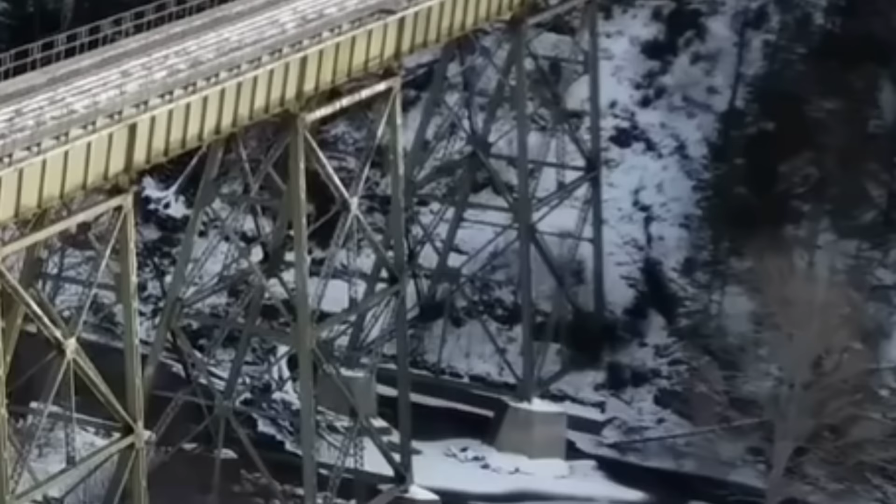A fully loaded freight train, thousands of tons, reaches a century-old bridge at full line speed. The driver doesn't brake. He's not supposed to. His rulebook, written by the engineers who assessed that structure, says maintain speed. Your instinct says that's reckless. Slower is safer. Less weight per second, less stress, less risk.

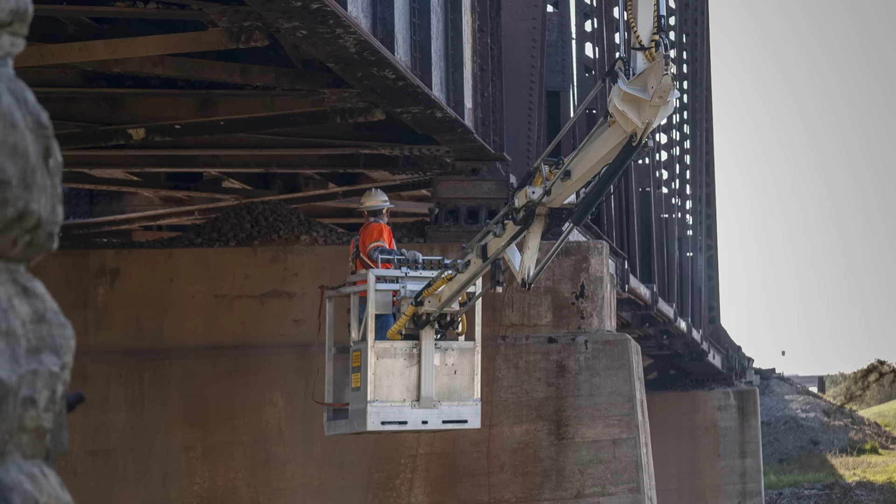But railway bridges weren't designed for caution. They were designed for a specific moving load at a specific speed. And here's what no one expects. Under certain conditions, slowing down on the span doesn't reduce the danger. It introduces forces the bridge was never built to handle.

A freight train carrying 10,000 tons of cargo approaches a steel truss bridge built in 1920. The operator does not ease off the throttle. There are no yellow warning signals, no automated brake triggers at the approach, and no sudden commands from dispatch.

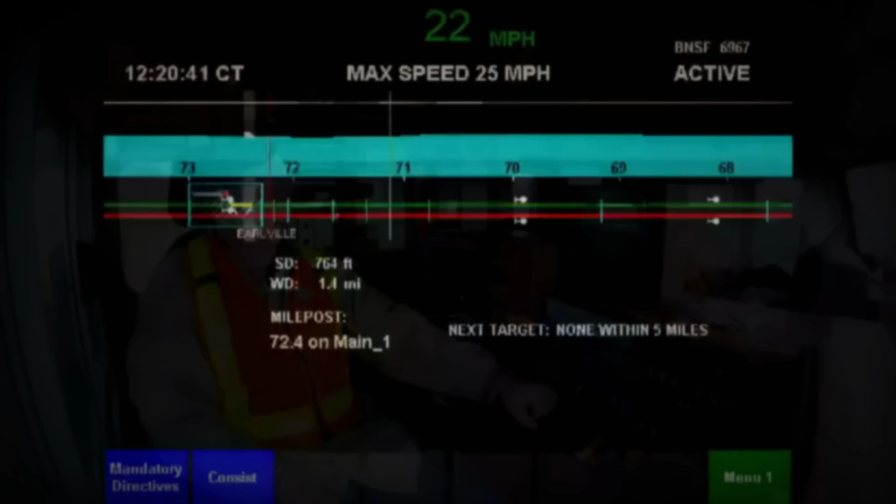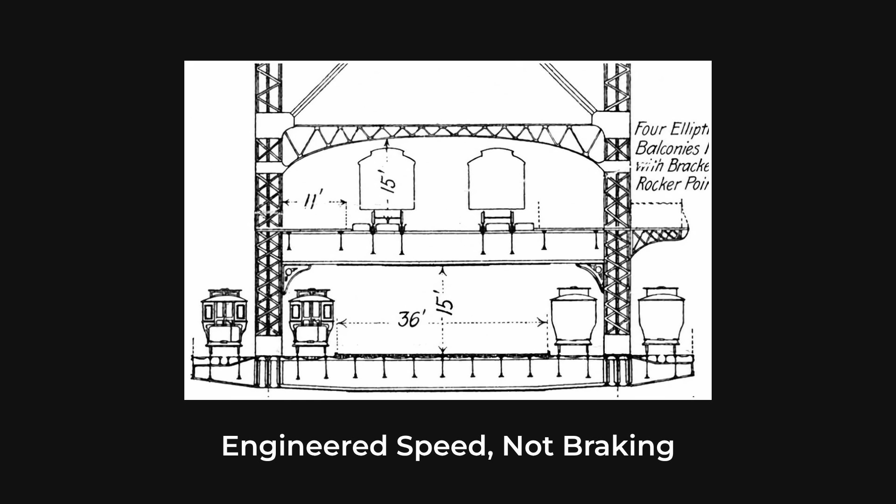Instead, the train enters the first span at 60 miles per hour, the exact line speed authorized for this segment of the corridor. This number is not a casual choice or a limit of the locomotive's engines. It is a strictly controlled operating value, calculated and approved by structural engineers long before this specific trip began.

To the driver, the century-old bridge is not a hazard requiring caution. It is simply another pre-approved section of the track. Yet, to anyone watching from below, this lack of braking feels incredibly wrong. Everyday experience on roads tells us that heavy loads must slow down for structures. But on the rails, the driver keeps moving forward at speed.

This apparent inaction exposes a fundamental rule of railway physics. Traveling over a bridge at a steady pace is highly predictable, whereas changing that motion might be the very thing that threatens the structure. Initiating deceleration while traversing a bridge can be more structurally demanding than continuing at a constant, authorized speed.

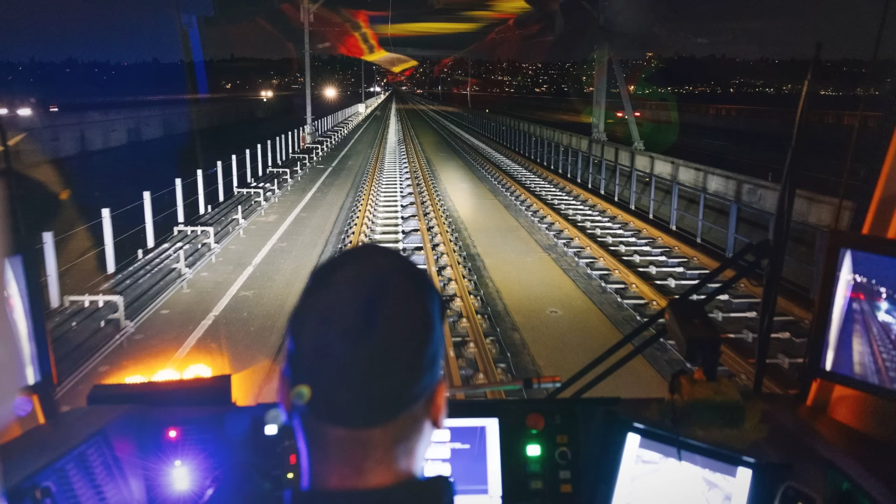This is not a claim that high velocity is inherently safe, nor is the practice of maintaining speed a universal rule. If a signal changes, an obstacle appears, or immediate danger threatens the track, emergency braking remains essential and non-negotiable. However, for a train already operating safely within its approved limits, a sudden change in speed alters how the structure performs. Slowing down does not automatically increase safety.

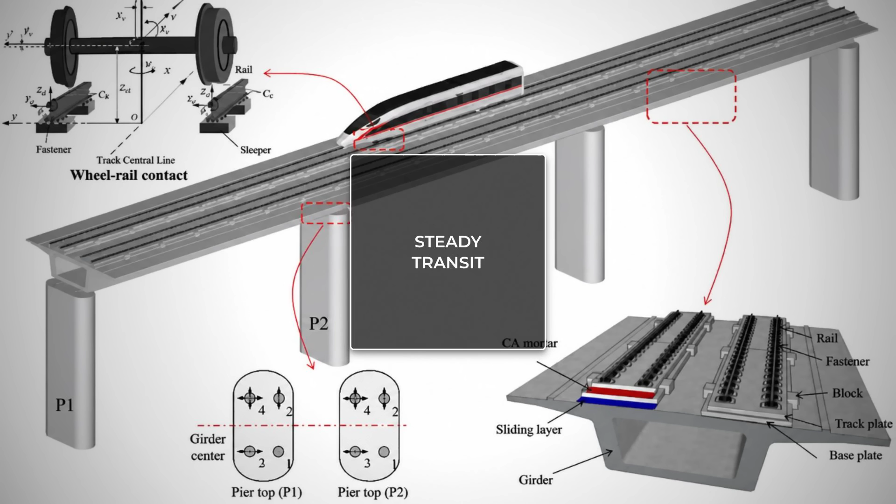Instead, the transition from one speed to another alters the physical state of the system, introducing forces that do not exist during steady-state transit. While a constant speed represents a balanced equation, changing that velocity changes everything. This raises a fundamental structural question. What happens to a bridge when a multi-thousand-ton vehicle changes its speed mid-span? And why does a steady, rapid crossing keep those hidden forces at bay?

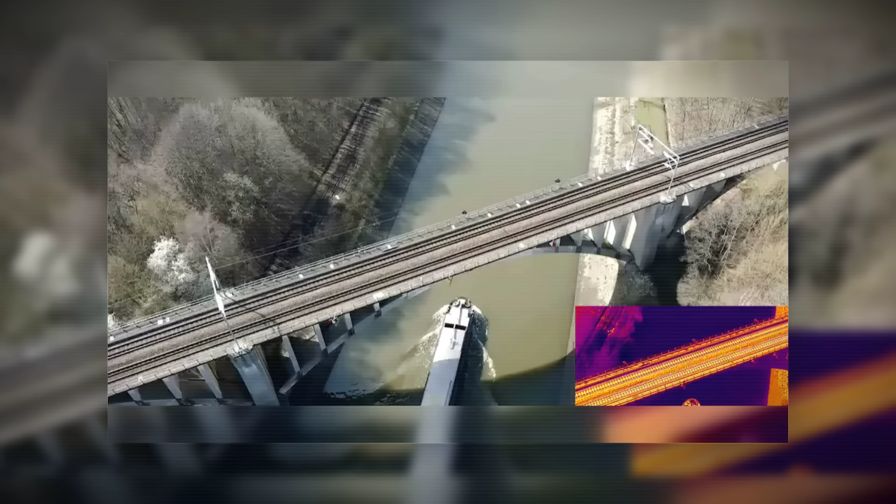Bridges are among the most heavily monitored assets on any rail network. Their structural integrity is constantly tracked through physical inspections, maintenance records, and strict operational controls. While early historical records sometimes associate these structures with catastrophic failure, actual accident databases show that collapses are rarely simple events. When metallic spans do fail, the causes are almost always foundation scour, material fatigue, or design limits, not speed.

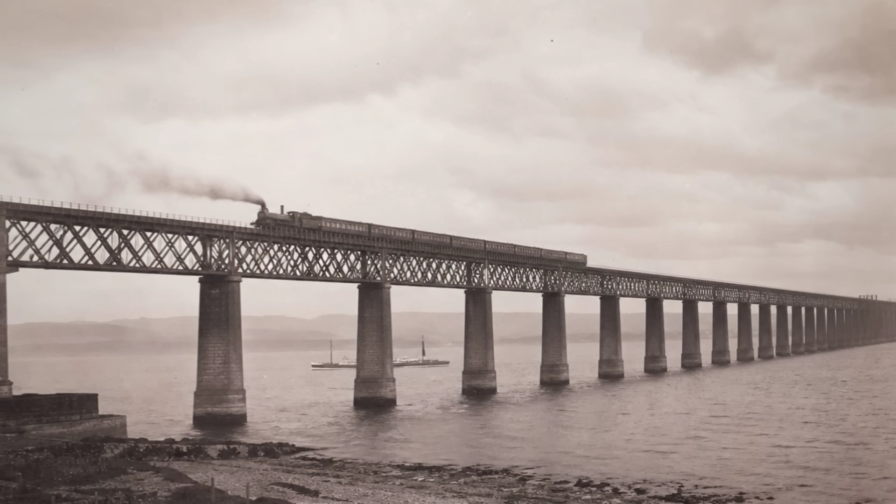Even the 1879 collapse of the Tay Bridge was not caused by a train traveling too fast. The official inquiry blamed weak wind bracing, defective cast iron lugs, and poor inspection standards during an extreme storm. The disaster served as a warning about structural assumptions under lateral wind loads, not velocity. Modern railway management relies on this distinction, shifting the focus to how an agency calculates exactly what a span can carry.

Our instinctive relationship with speed is forged almost entirely on the highway. If you are driving a car or a heavy truck toward a narrow or aging bridge, your natural reaction is to lift your foot off the accelerator and press the brake. This response is entirely rational. In road transport, lower speeds directly translate to safety.

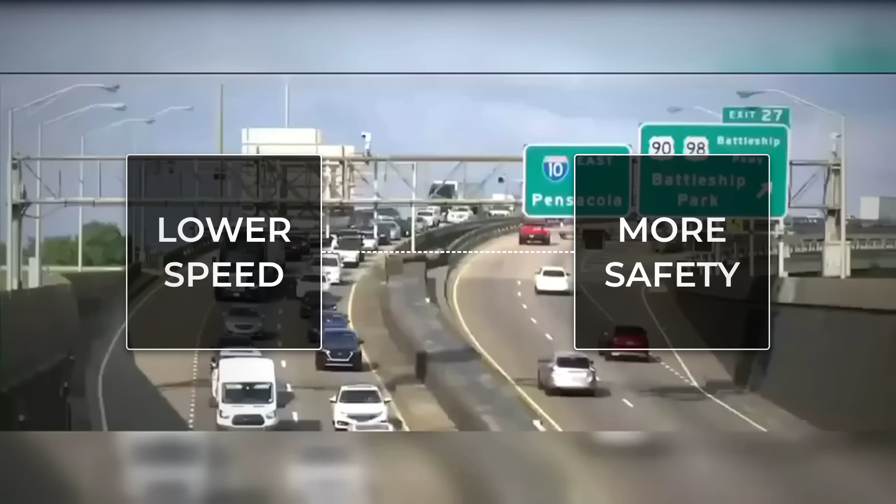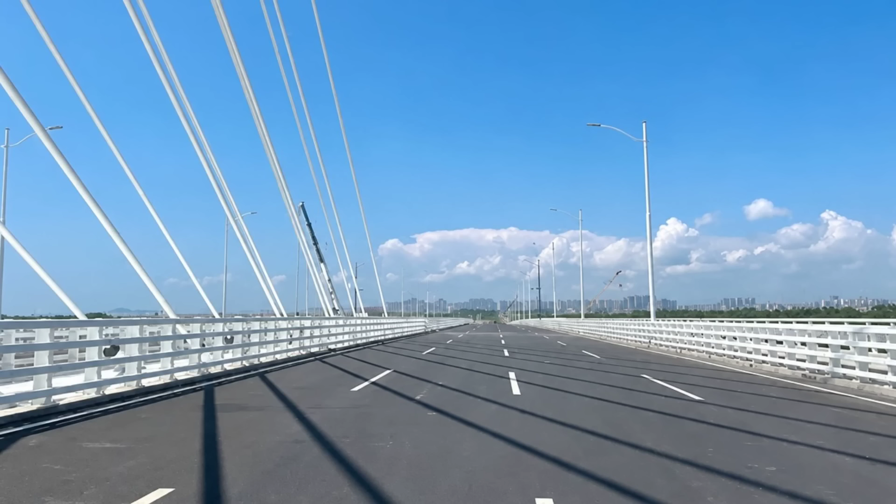By slowing down, you dramatically reduce the kinetic energy of your vehicle, which decreases exponentially with every mile per hour you shed. If a hazard appears on the span, a slower vehicle gives its driver more time to perceive the danger, steer away, or bring the vehicle to a controlled stop. Even if a collision is unavoidable, the force of the impact is vastly diminished, saving lives and protecting the bridge's guardrails and supports from catastrophic damage.

On the road, going slower is an uncomplicated way to reduce physical stress and lower the stakes of any unexpected event. However, applying this highway mindset to a multi-thousand-ton train reveals a major disconnect between road traffic and railway physics. A road vehicle is a self-contained, highly localized mass that relies on steering and rapid friction changes to navigate.

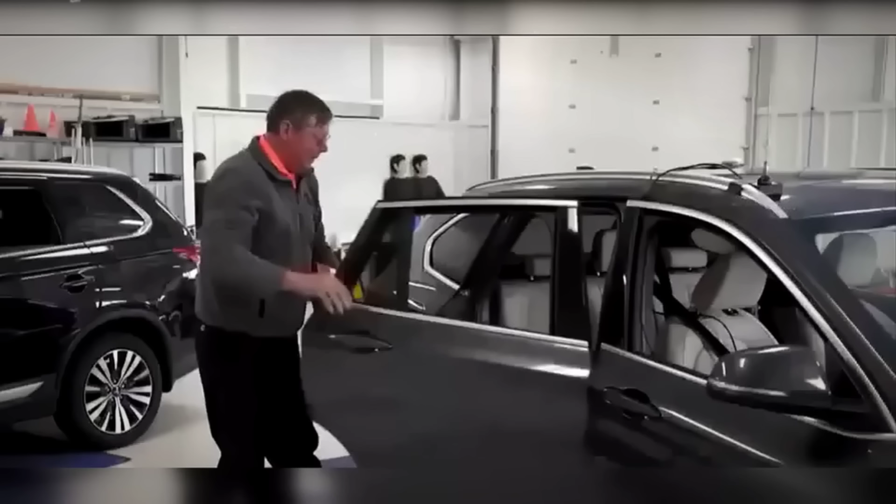When a driver slams on the brakes, the car undergoes a sudden shift in balance, transferring its weight forward onto the front tires over a tiny patch of pavement. A train, by contrast, is a vastly different physical entity. It is an incredibly long, continuous chain of heavy segments, with its immense weight distributed across dozens or hundreds of individual axles. Because of this distribution, a railway bridge does not experience a train as a single, massive blow.

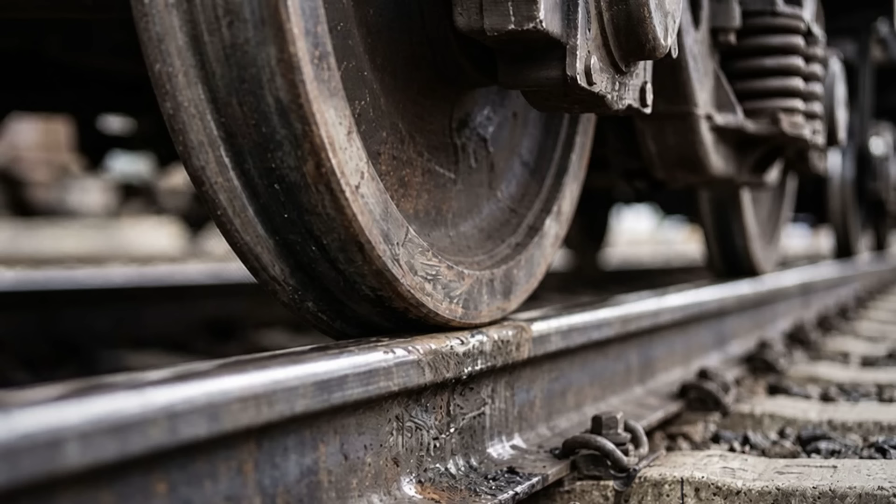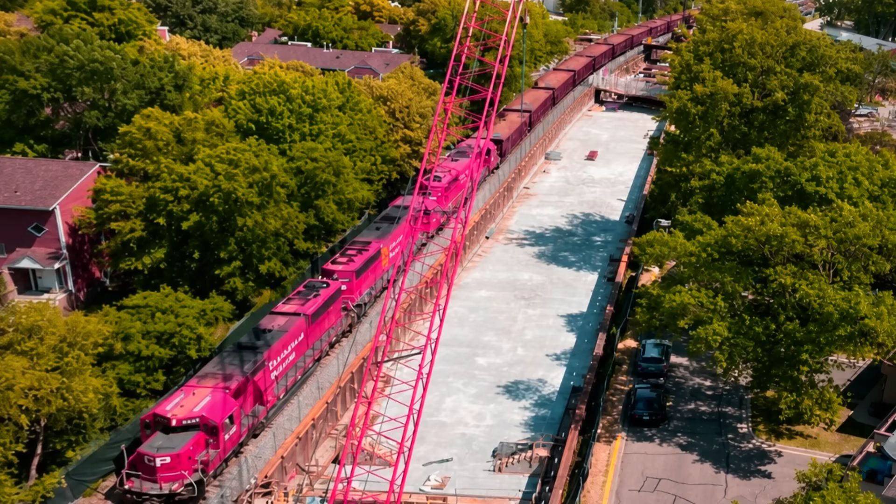Instead, the structure registers the train as a highly organized, rhythmic sequence of individual axle loads, arriving one after another. The bridge deck, the underlying steel girders, and the supporting concrete piers respond to this sequence in real time. The bridge's response is governed by both the total mass of the train and the precise spacing of those individual wheel loads. This means that speed changes both the size and the precise timing of the forces acting on the bridge. As each axle rolls onto the span, it sends a wave of energy through the structure.

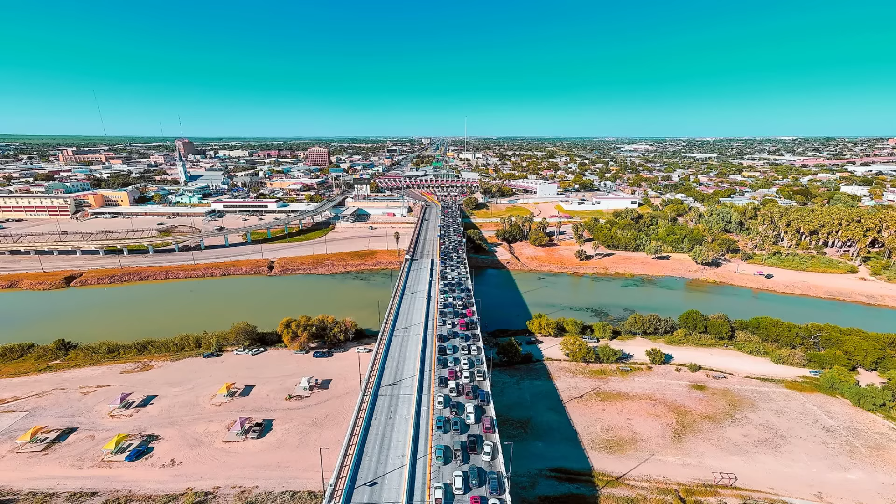If the train is moving at a constant, predictable rate, these pulses of energy flow through the bridge in a highly patterned way. At this level of scale, the train and the bridge behave as a single unit. They function together as a connected mechanical system, where the movement of the train and the elastic flexing of the steel and concrete are bound in a continuous physical dialogue. The common assumption that slowing down is always safer ignores how this coupled system operates. To see why a fast, steady crossing is often the gentlest path across a span, we must examine what happens when this carefully balanced mechanical relationship is suddenly disrupted.

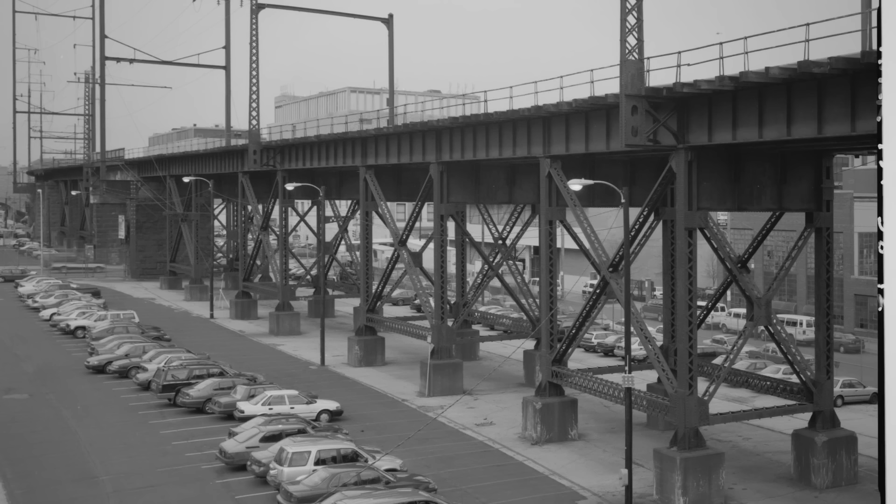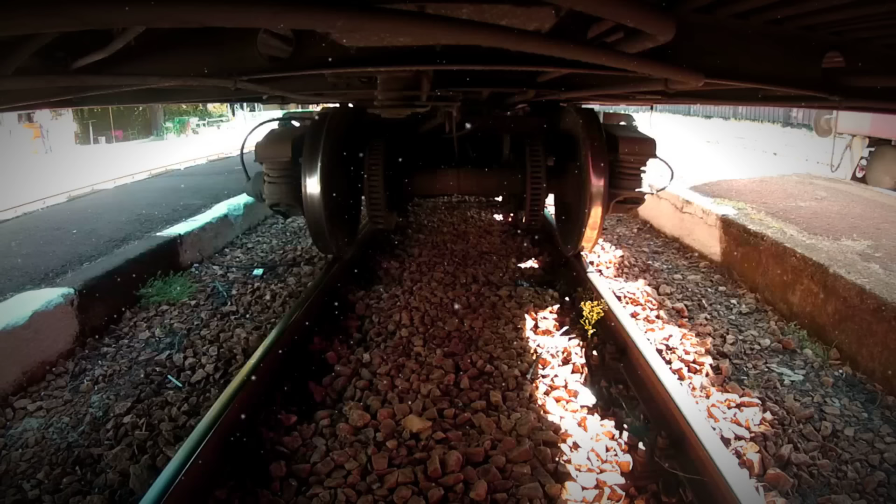A train parked on a bridge represents a straightforward structural problem. It is a dead weight, a static load that exerts a constant, unchanging downward force on the steel and concrete below. But the moment those wheels begin to turn, the physics of the bridge shift entirely. A train crossing a span at 60 miles per hour acts as a rapid series of physical impacts, a moving sequence of axles that creates an entirely different structural case. As each set of wheels rolls onto the span, travels across, and departs, it introduces forces that fluctuate in real time. The bridge deflects downward, springs back upward, and vibrates.

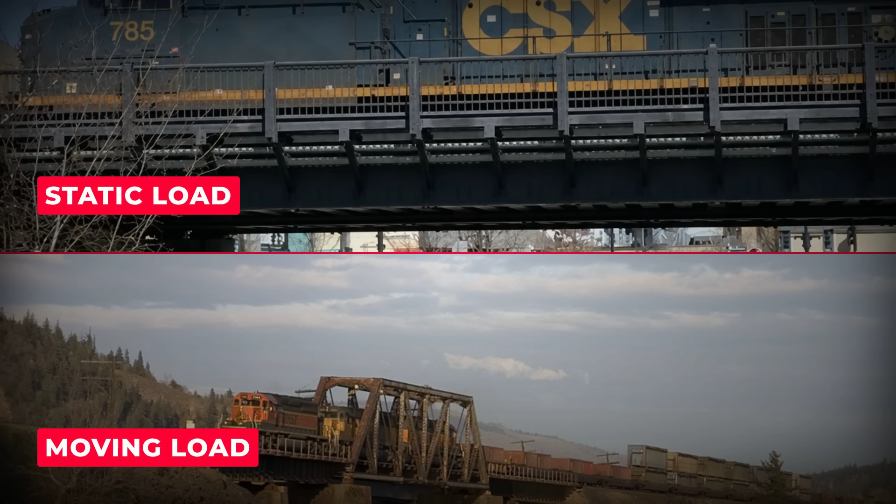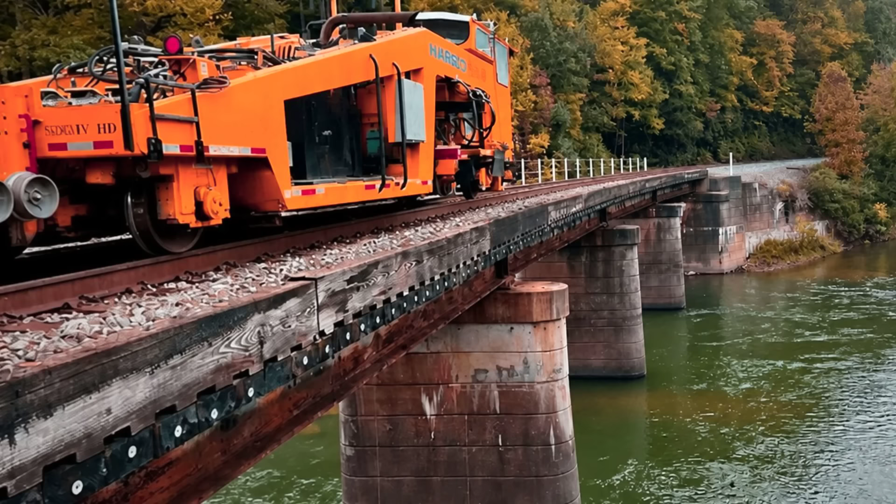This motion-related increase in structural stress is known as dynamic load amplification. It represents the divergence between a load placed gently upon a structure and that same load rolling across it at speed. This amplification is not a simple, fixed number. It is a complex, fluctuating value shaped by the physical relationship between the vehicle and the structure. Several factors dictate this behavior: the length of the span, the speed of the transit, the precise spacing of the axles, the overall mass of the train, the behavior of the locomotive suspension, the damping characteristics of the bridge, and even tiny irregularities in the track itself.

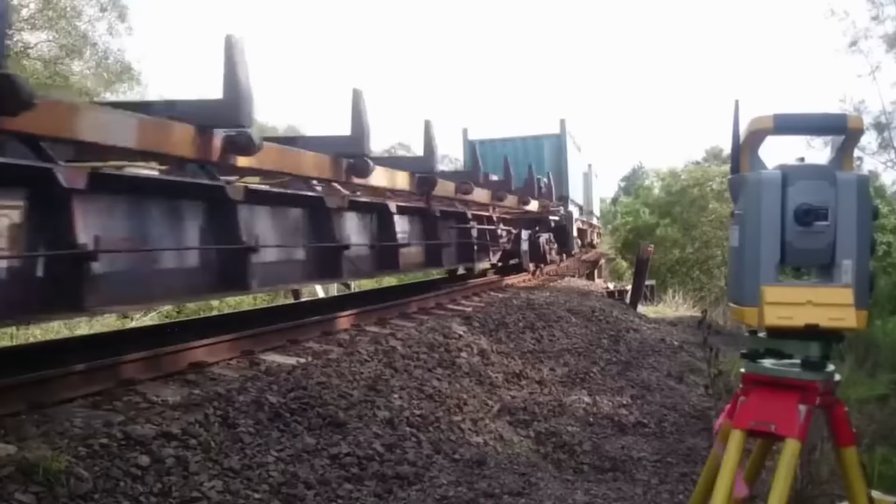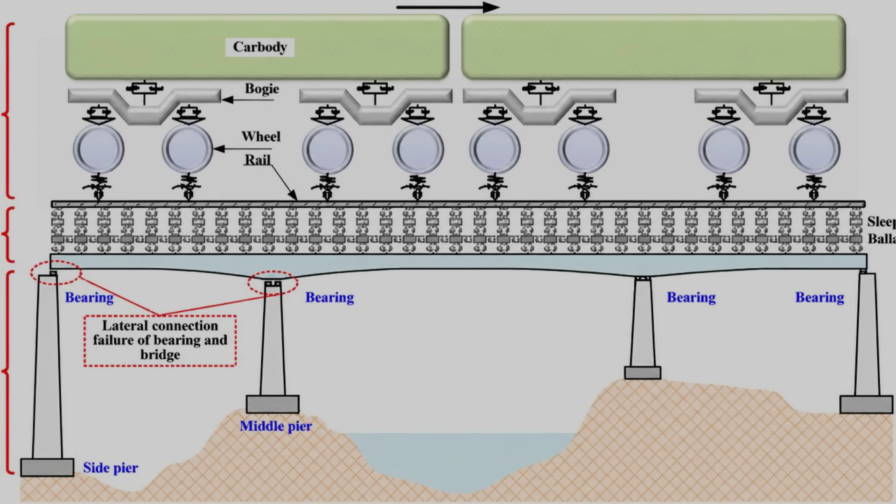Across the Atlantic, European standards, or Eurocodes, approached the problem using a dynamic factor represented as 1 plus phi, requiring exhaustive analysis for highly sensitive high-speed lines. Rather than universal laws, these formulas serve as context-specific guidelines designed to protect different types of infrastructure. Some might assume that building an exceptionally stiff bridge eliminates these motion-induced vibrations entirely, but structural stiffness only dampens the effect. It does not erase it.

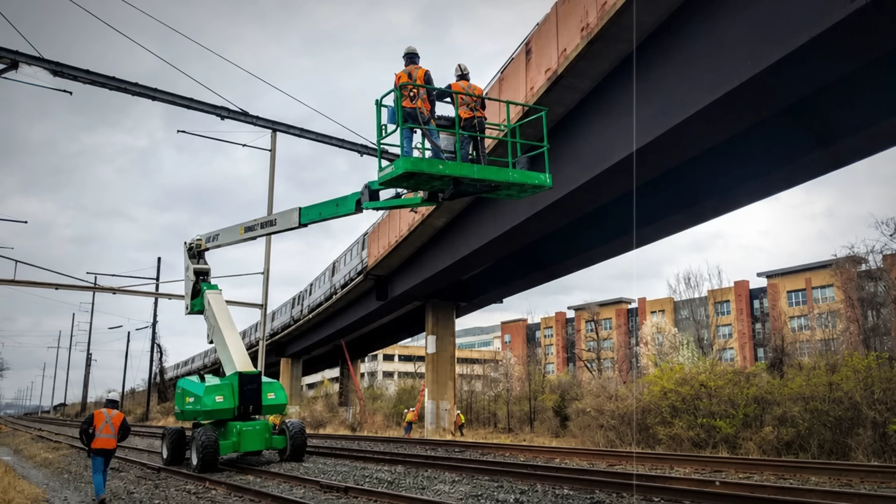Even the most rigid steel girder still experiences some level of dynamic amplification when thousands of tons of metal roll across it. The train and the bridge remain locked in a physical relationship where movement itself changes the load, forcing engineers to design not just for weight, but for the complex physics of constant motion. An authorized operating speed is not an arbitrary limit. It is the output of a precise structural assessment. Engineers do not design for a generic train. Instead, they evaluate each bridge against highly detailed load models that replicate the exact types of traffic the line will carry. There is no single, universal speed setting that applies to every structure.

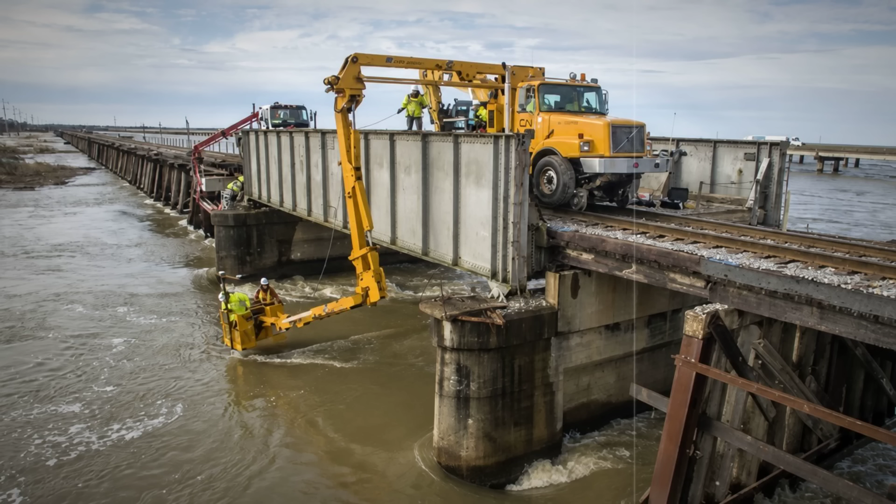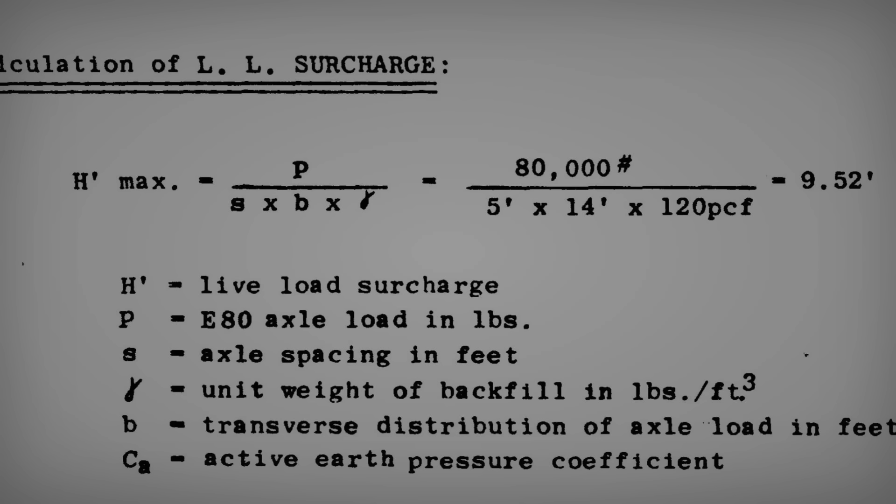Rather, each span is calculated using specific assumptions about axle loads, train formations, track quality, and structural health. In the United States, the primary reference for these calculations is the Cooper E80 design load, which simulates a series of 80 kip axle loads representing the heaviest freight locomotives.

Across the Atlantic, European engineers rely on a different set of standardized load cases. Load Model 71 represents standard passenger and freight traffic with a 4-axle, 1,000 kilonewton vehicle. For heavier or continuous configurations, design rules require load models SW0 and SW2. When line speeds exceed 200 kilometers per hour, European standards mandate the high-speed load model.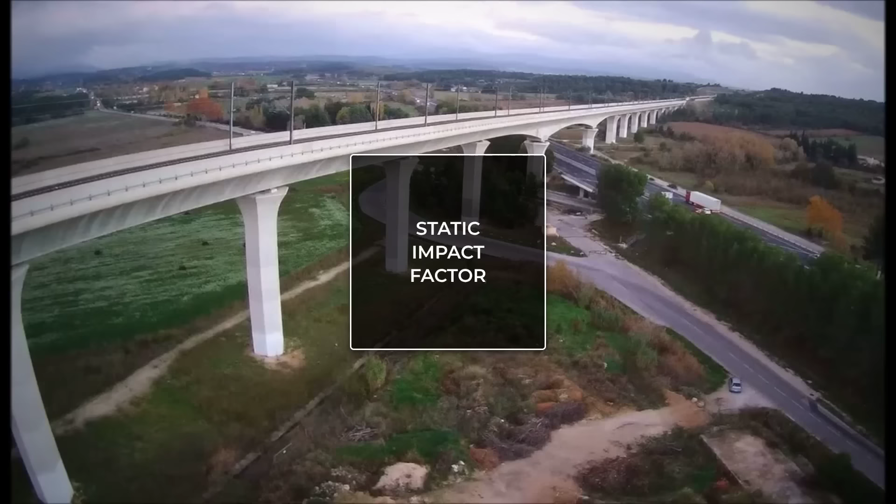This framework uses two universal train configurations, HSLM-A and HSLM-B, with variable passenger coach lengths and axle spacings to model the rapid, cyclic forces of articulated trains. For high-speed operations, engineers cannot rely on a simple static impact percentage. They must run a detailed dynamic verification to calculate how the span reacts to the precise timing of those incoming axle loads relative to the bridge's own natural vibration frequency.

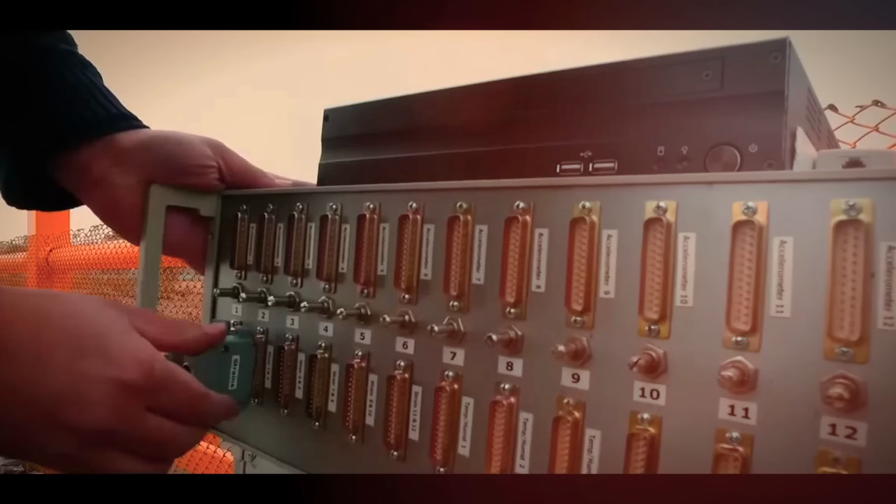This process establishes the authorized speed limit as a customized operating value for that specific asset. When a train crosses the bridge at this designated velocity, the entire system behaves exactly as the design equations intended. The train isn't fighting the bridge, it is completing an equation the bridge was built to solve. This smooth, uninterrupted transit represents the expected baseline state of operation. But that balance is predicated on a constant, predictable motion. What happens to the structural math when the train stops following this expected pattern and begins to change its speed?

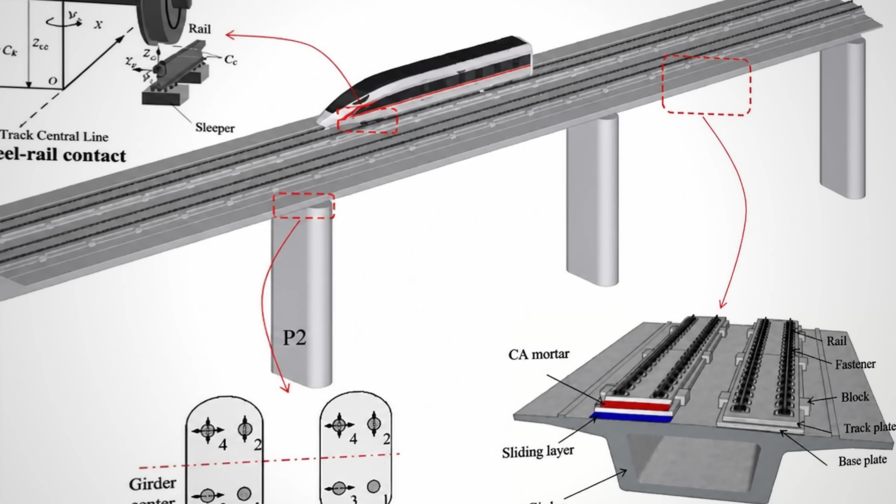The moment an operator applies the brakes, a new physical force takes over. Instead of just pressing down on the rails with its immense weight, the decelerating train begins to drag the entire bridge along with it. This horizontal action, known as longitudinal force, acts along the line of the track, rather than downward through the axles. During deceleration, the friction at the wheel-rail contact zone creates a powerful rearward reaction. Rather than dissipating harmlessly, this energy travels. It transfers directly through the rail fasteners, passes into the bridge deck, and drives into the bearings, piers, and eventually the massive concrete abutments at either end of the span.

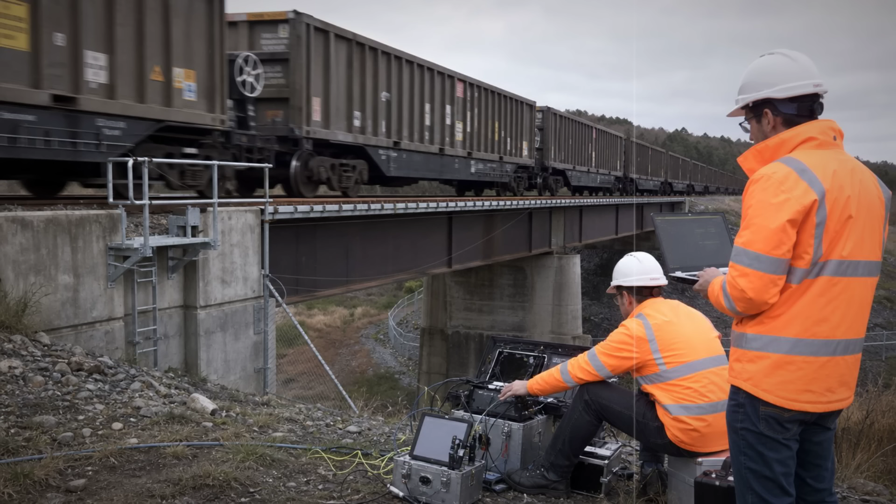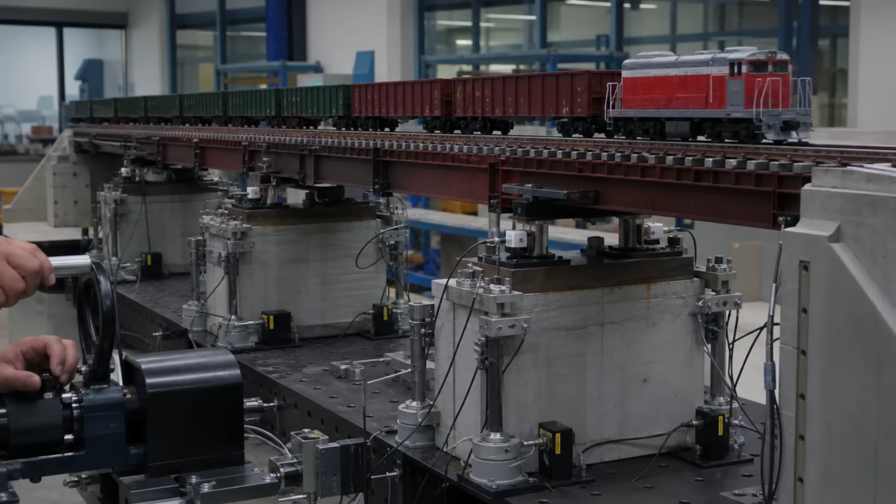Field measurements illustrate the physical scale of this transfer. In specific structural studies of mainline bridges under heavy braking, engineers have recorded longitudinal forces ranging from 20 to 150 kilonewtons. This value is not a universal rule, and the exact force depends on a complex web of variables. The overall length of the train, the distribution of the braking systems, the steepness of the local gradient, and the relative stiffness of both the track structure and the bridge supports all dictate how this load distributes itself.

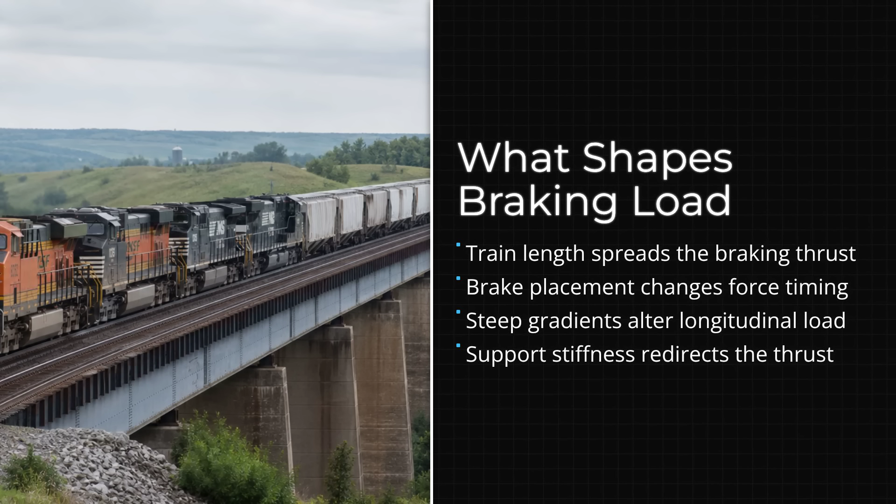For bridge designers, managing this horizontal thrust is far less routine than supporting a train rolling steadily across the span. Smooth, constant speed transit is dominated by vertical forces, which are highly predictable and easily absorbed by the deep steel girders and concrete columns. Braking, by contrast, introduces an asymmetric, transient load path. It forces engineers to design for combined load cases where vertical gravity and sudden longitudinal thrust act on the structure simultaneously. While braking is a standard design action and not automatically catastrophic, it forces the entire bridge to work significantly harder than it does during a simple, uninterrupted crossing.

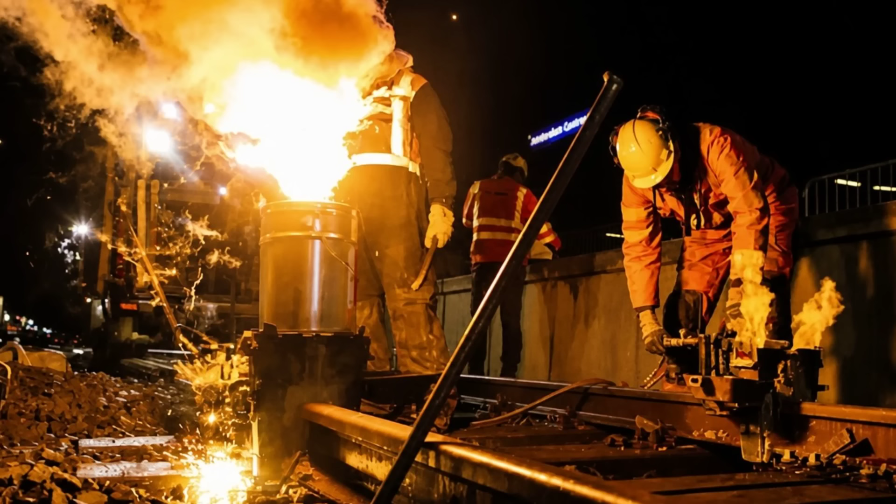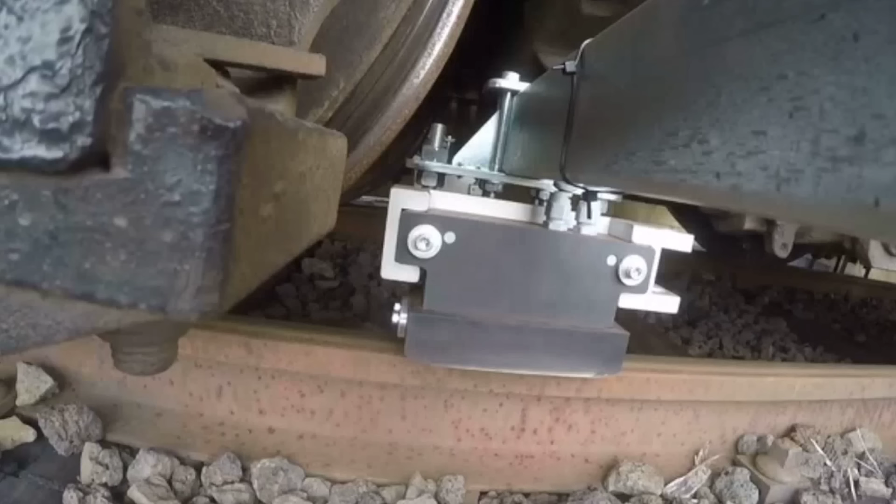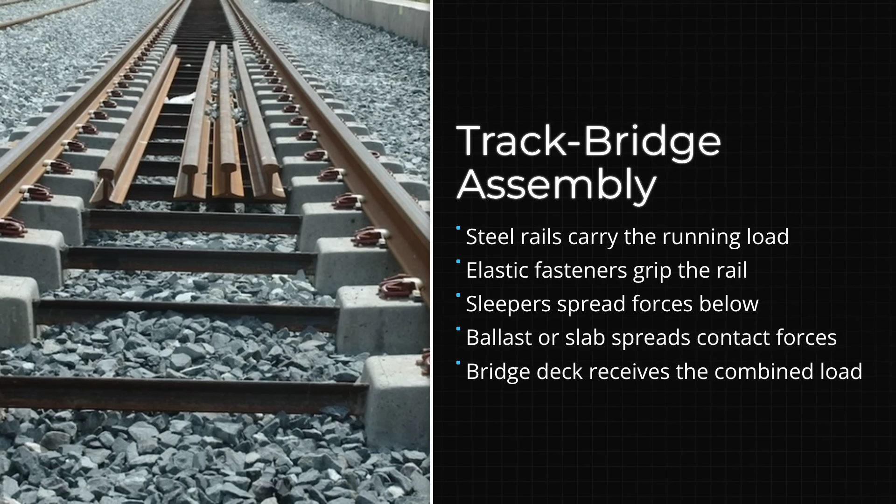Continuous welded rail forms an unbroken steel corridor across the landscape and over the bridge itself. Instead of traditional jointed tracks with gaps that allow individual rail segments to expand and contract, modern corridors weld these rails into miles-long continuous ribbons of steel. This creates an uninterrupted longitudinal pathway, but it also means the track cannot easily relieve its internal stresses. To keep the track stable, the rail must be bound tightly to the bridge. This connection is a complex structural assembly consisting of the rails, elastic fasteners, sleepers, ballast or concrete slab, and the underlying deck. These components do not function in isolation.

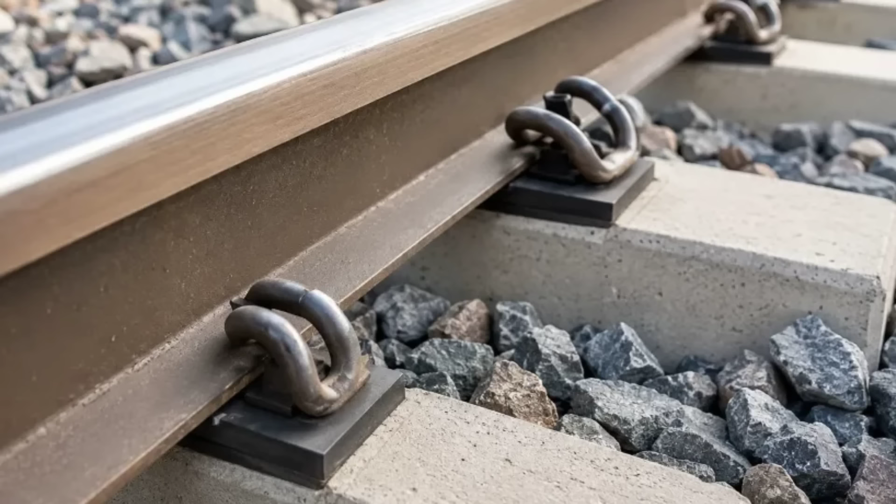When a train accelerates or brakes, the horizontal forces do not stay localized under the wheels. Instead, the relative stiffness of the fasteners, track bed, bridge bearings, piers, and concrete abutments determines how this energy disperses. This physical link is governed by rail-structure interaction. Under the International Union of Railways, or UIC standards, the track and bridge are analyzed as a single, coupled system. This coupling is critical when dealing with thermal forces. The internal axial load of a restrained rail is represented by the formula: normal force equals the elastic modulus of steel times the cross-sectional area of the rail, multiplied by the coefficient of thermal expansion and the temperature change (N = E·A·α·ΔT).

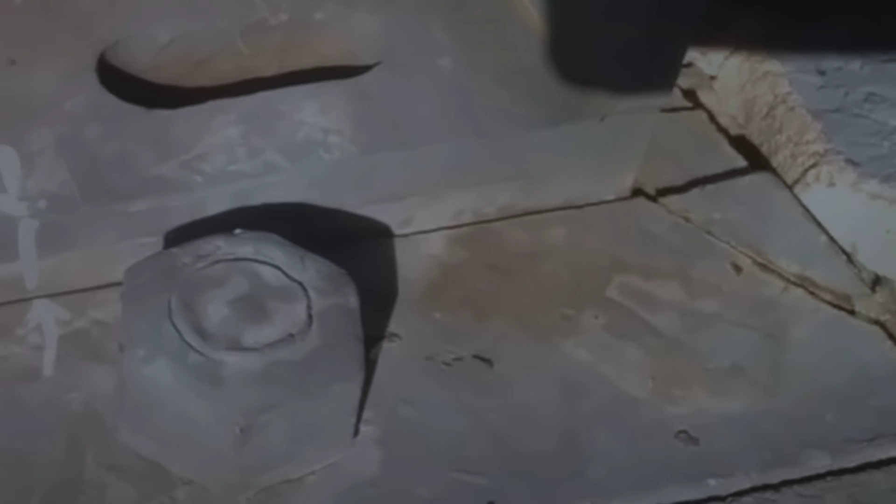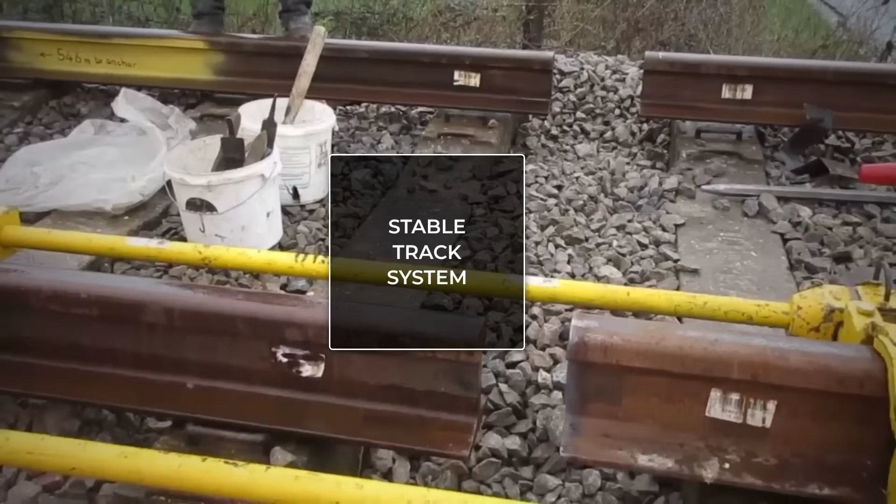But this mathematical ideal only holds under the actual physical restraint conditions of the bridge deck. While a smooth transit rolls over this unified system with minimal friction, braking and traction actively stress the connection, turning a stabilizing track system into a direct conduit of horizontal force.

Every bridge possesses its own set of natural vibration modes, much like the strings of an instrument. When a train moves across a span, the repeating sequence of its axle loads acts as an external force, tapping the structure at a regular interval. This rate of impact is not random. It is governed by a basic timing relationship.

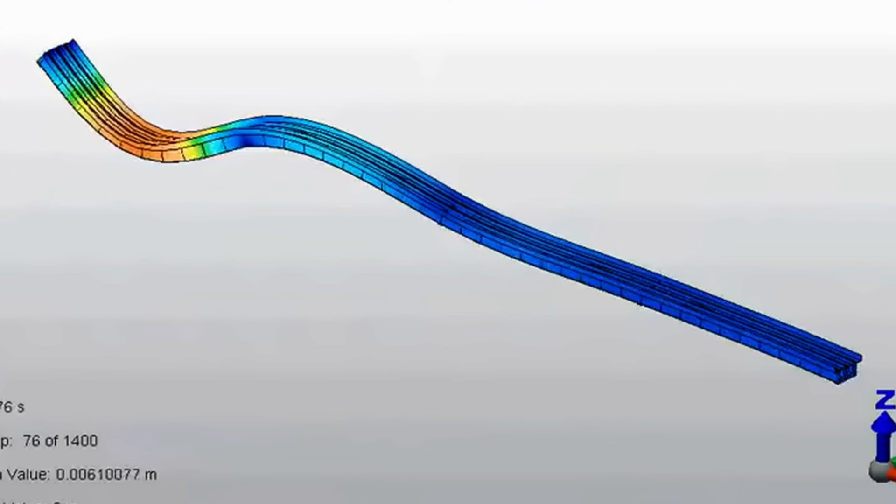The arrival frequency equals the train speed divided by the distance between the axles, or f_A = V / D. Here, velocity is the variable that directly controls how rapidly these heavy wheel loads strike the bridge deck. If the train travels at a rate where this loading frequency matches one of the bridge's natural vibration modes, the system can enter resonance. In this state, even modest forces can begin to multiply.

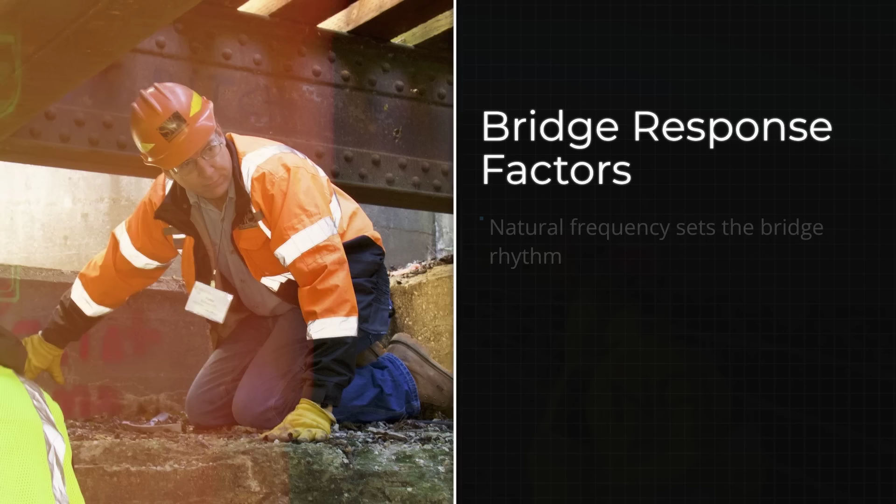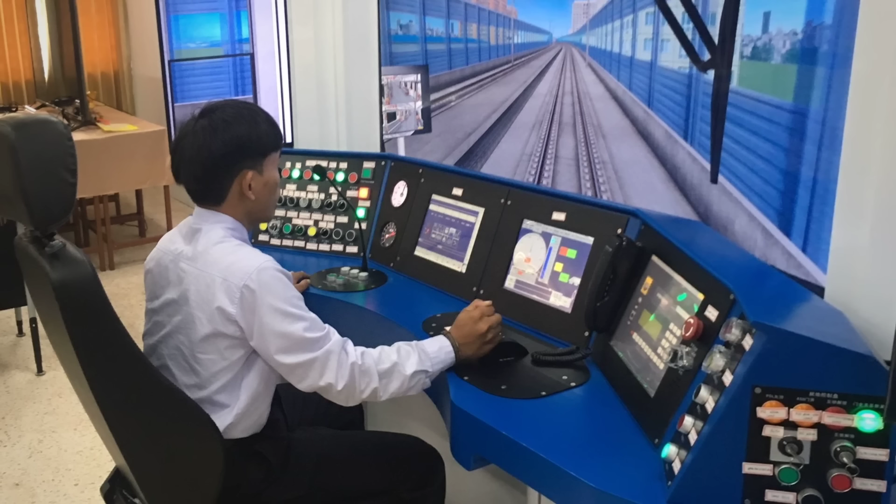Yet this critical response is not a simple function of speed alone. It is determined by an intricate network of physical factors, including the bridge's natural frequency, stiffness, mass, and damping capacity, alongside the train's specific configuration, its vehicle suspension characteristics, and the overall quality of the track. Because of this complexity, managing resonance is not left to driver guesswork or sudden onboard adjustments.

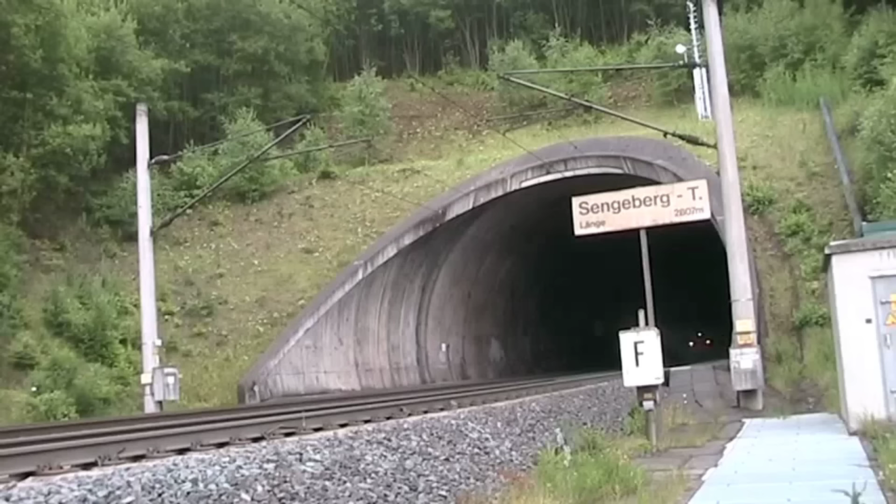Engineers use precise mathematical models to evaluate these relationships long before a route is cleared for service. By tuning the stiffness and mass of the bridge during the design phase, and by implementing formally calculated speed limits, operators ensure that standard trains operate safely outside these specific vulnerability windows. On high-speed lines, resonance is an engineered-out exception, not an inevitable hazard of rapid transit.

Slowing down does not reduce the weight of the train or decrease the number of axles rolling across the rails. Instead, reducing speed increases the residence time, the total duration of the train-bridge interaction. When a multi-thousand-ton load remains on a span longer, the structural elements must support that mass for an extended period. This longer occupancy changes the duration and overlap of the bridge's internal stress cycles. In specific structural models, this prolonged exposure can actually generate more fatigue cycles rather than fewer.

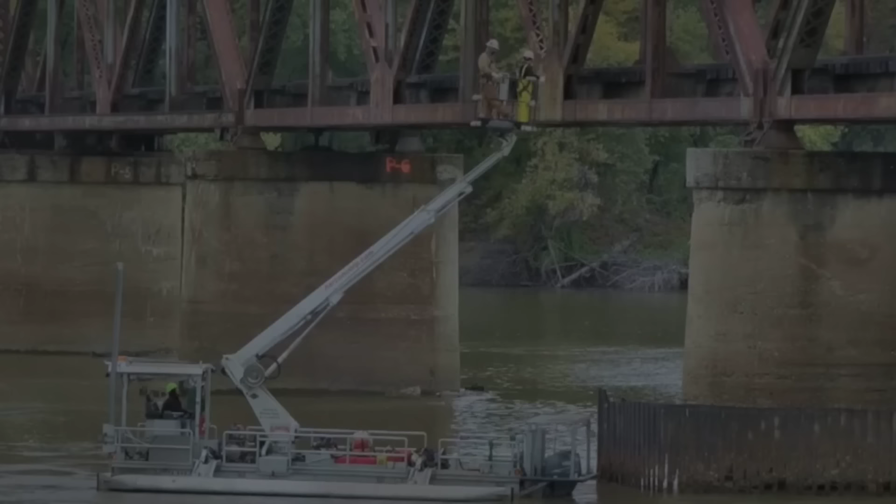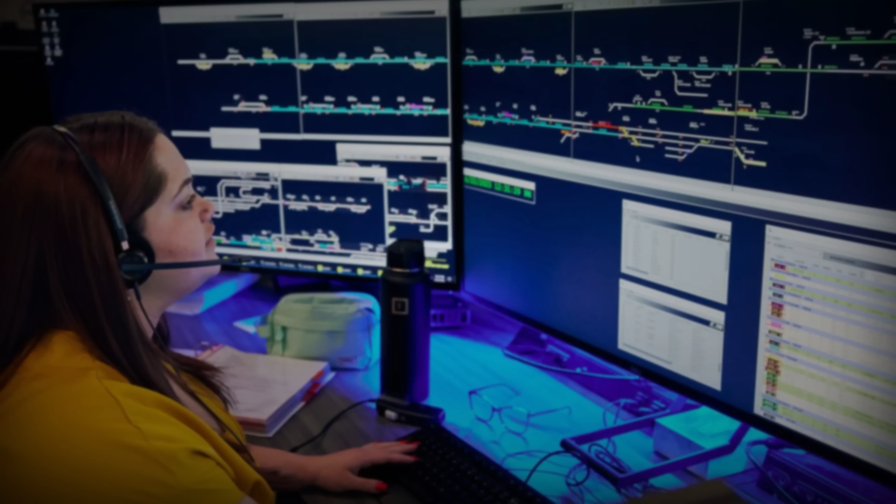Fatigue damage is not a simple calculation of speed. It depends on the stress range, the specific structural details, traffic frequency, and the existing physical state of the bridge over its entire service life. Leaving a massive load on the structure longer provides no automatic structural benefit. Any change to a train's operating speed must stem from a formal engineering reassessment of these variables, rather than a driver's split-second choice to slow down. This requirement for calculated, official operating limits explains why trains sometimes do travel slowly over specific compromised spans.

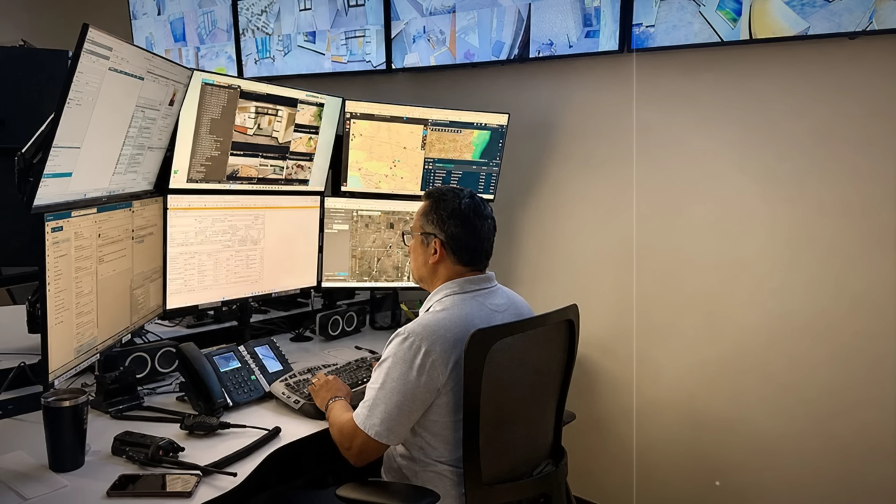Trains do, of course, sometimes slow down on bridges. If you stand near a rail line long enough, you will eventually see a heavy freight manifest or a passenger service creep across a span at a fraction of its normal velocity. But these slow passages are not an argument against maintaining speed. They are a formal exception to the rule, dictated by temporary speed restrictions.

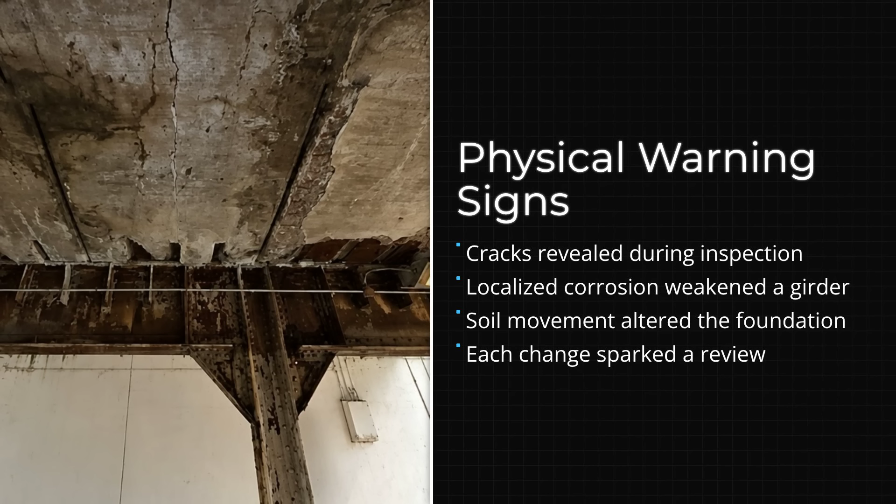When an infrastructure manager like BNSF or Union Pacific issues a temporary order, they are reacting to a specific, documented change in the bridge's physical state. It might be a crack found during a routine inspection, localized corrosion in a steel girder, or a shift in the underlying soil. This is not the driver choosing to be cautious. It is an engineering recalculation. When a structure's physical capacity changes, the math that governs its authorized speed must change with it.

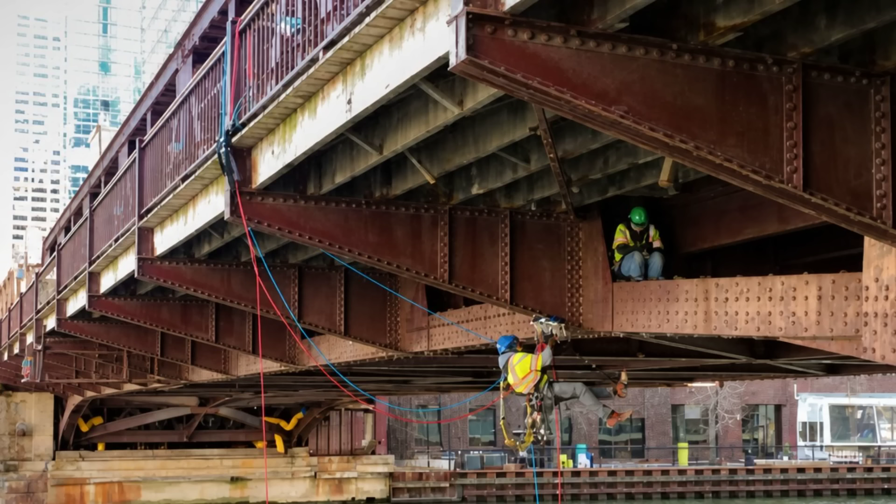In October 2020, on a rail corridor managed by Union Pacific, inspectors discovered localized steel fatigue on a 70-foot deck plate girder bridge. The bridge had an original assessed line speed of 40 miles per hour. Following the discovery, the railroad immediately issued a temporary restriction, reducing the authorized speed to 10 miles per hour. This structural trigger changed the math.

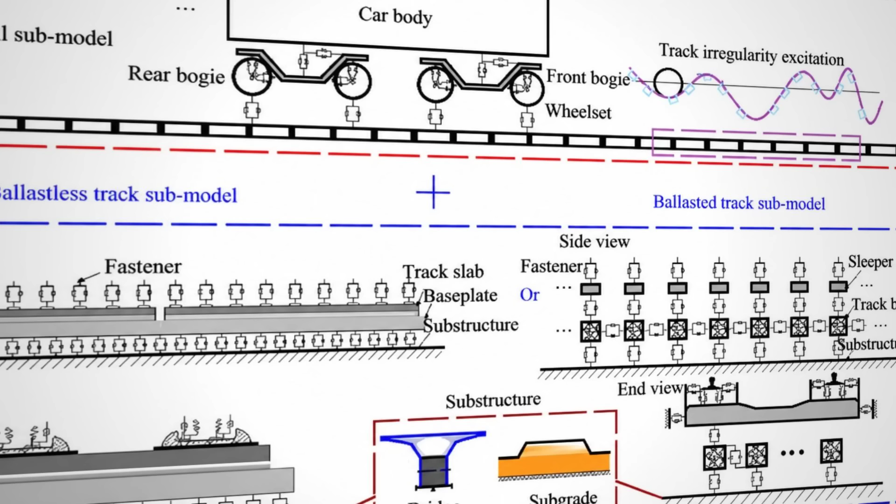The 10-mile-per-hour limit was not an appeal to driver caution, but an engineering control designed to lower the dynamic amplification factor to near-static levels. Once rehabilitation work was completed and verified by structural engineers, the temporary restriction was lifted, and the original 40-mile-per-hour design speed was restored.

This type of controlled deceleration is fundamentally different from a driver braking on the bridge itself. A temporary speed restriction is issued long before the train ever reaches the span. The train's speed is reduced on the approach, meaning the vehicle enters the bridge at a steady, lower velocity.

There is no sudden transfer of horizontal braking force, no unexpected longitudinal thrust on the bearings, and no surprise surge of energy through the continuous welded rail. The train is still crossing at a constant, predictable rate. It is simply completing a different, more conservative equation.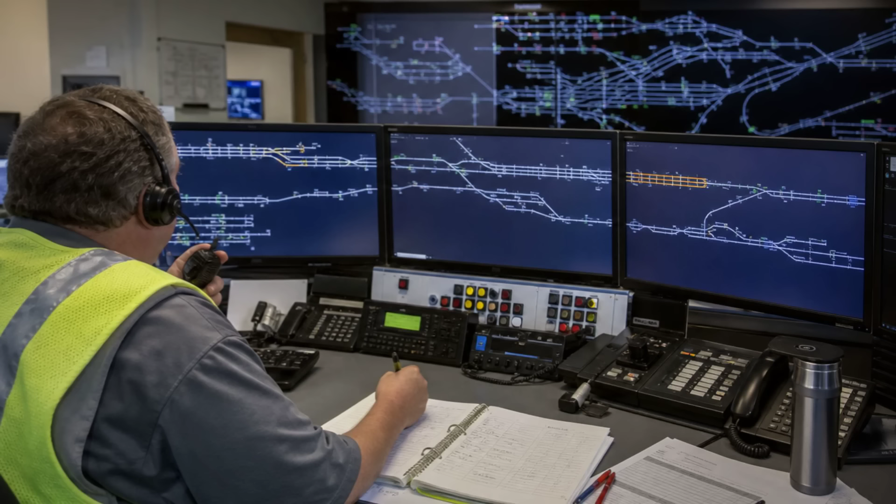Slowing down under an official order is a calculated revision of the system's limits. It does not prove that driving slowly is inherently safer for a healthy bridge. Instead, it demonstrates that safety on the rails always relies on absolute predictability. When a bridge is compromised, the infrastructure manager resets the parameters so that the train's passage remains perfectly aligned with what the weakened steel or concrete can handle.

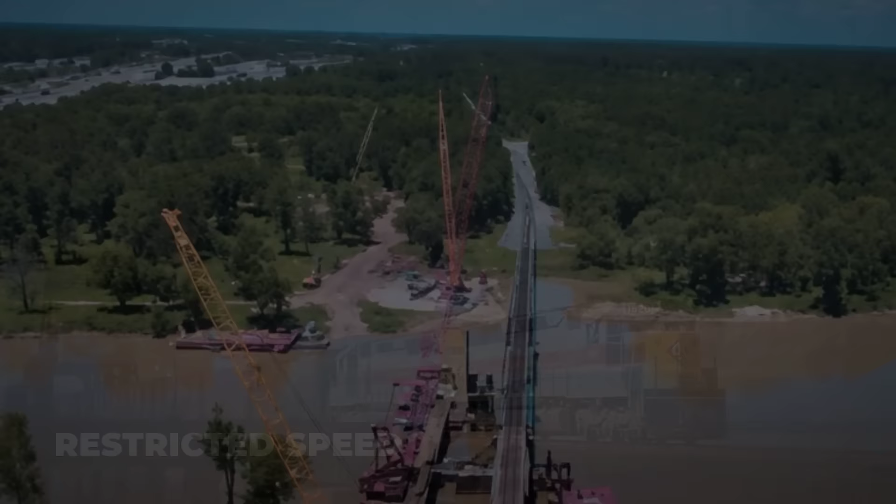Once the repair crews finish their work and the structure is verified, the restriction is lifted, the design speed is restored, and the trains resume crossing at full throttle, exactly as the equations intended.

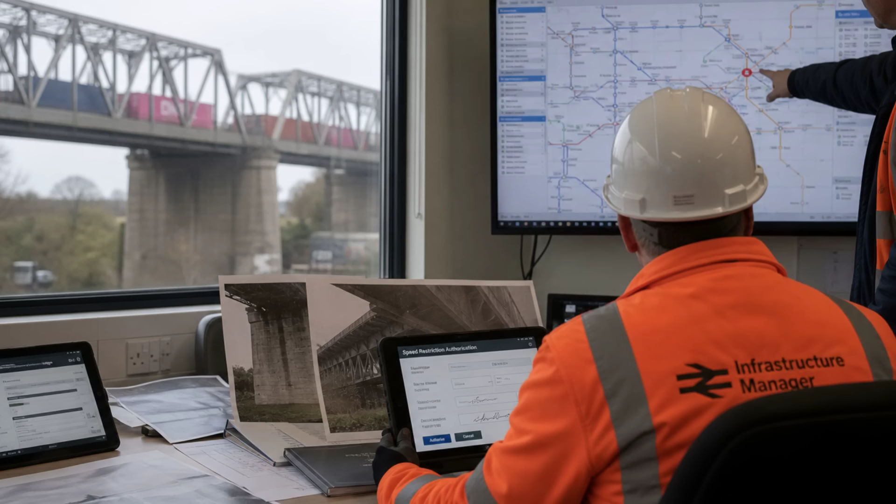Every bridge functions as a fixed bottleneck on a high-capacity route. When an infrastructure manager reduces a span's authorized speed, the impact immediately expands far beyond that single stretch of steel and concrete. A single localized deceleration ripples backward through the entire corridor, delaying following trains and locking up signaling blocks for miles behind. These operational delays quickly cascade, disrupting regional timetables for hours and costing operators significant sums in lost capacity. Yet these heavy operational penalties are entirely separate from the structural safety calculations.

A railway network enforces strict, centralized protocols, rather than relying on a driver's personal judgment or improvised caution. If a bridge is compromised, the temporary slow order remains firmly in place while physical analysis, repair, or engineering reassessments occur. This restriction is not a casual precaution, but a formal, calculated intervention.

Safety decisions on the rails never compromise structural integrity to preserve corridor throughput. The entire system is built to favor absolute, predictable engineering controls, absorbing the logistical and financial costs of a delay to ensure the physical limits of the bridge are never violated. The ultimate responsibility for this predictability rests not with the person in the cab, but with the infrastructure manager.

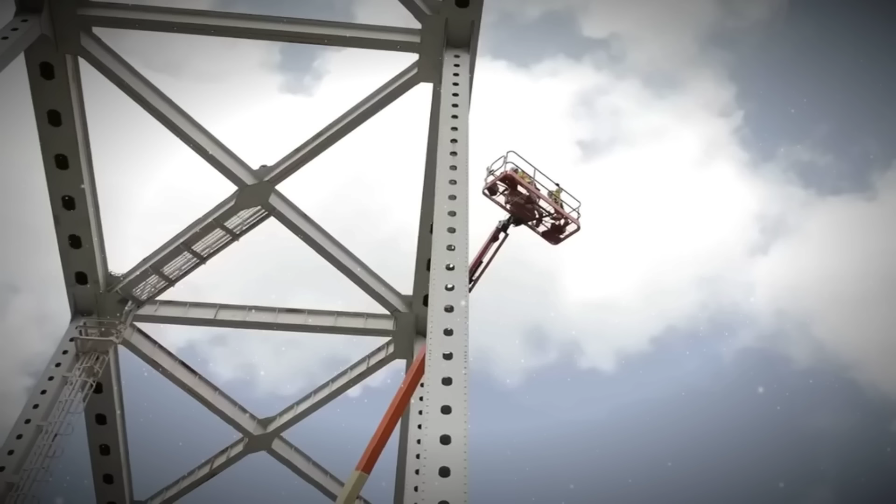Behind every train maintaining its speed is a continuous network of diagnostics, physical inspections, and data tracking. Scheduled inspection regimes constantly search for physical deterioration, structural shifting, and localized damage, ensuring the bridge's physical state matches its design parameters. These physical checks feed directly into structural assessment records, which define the precise operating boundaries for every segment of track. To supplement visual inspections, many networks deploy active load monitoring systems.

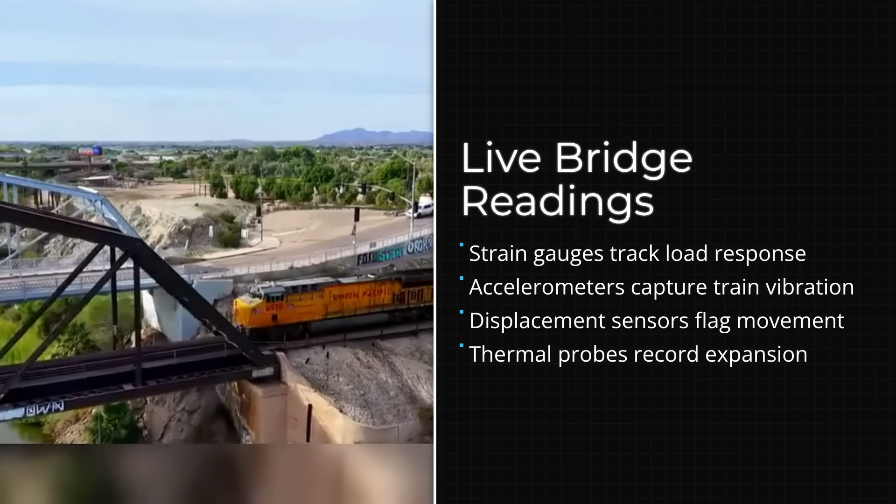Sensitive instruments permanently attached to key steel and concrete members measure real-time strain, acceleration, structural displacement, and thermal changes under the weight of passing traffic. This incoming data is paired with advanced fatigue modeling, which calculates how millions of repeated axle passes degrade the metal over a bridge's decades-long service life.

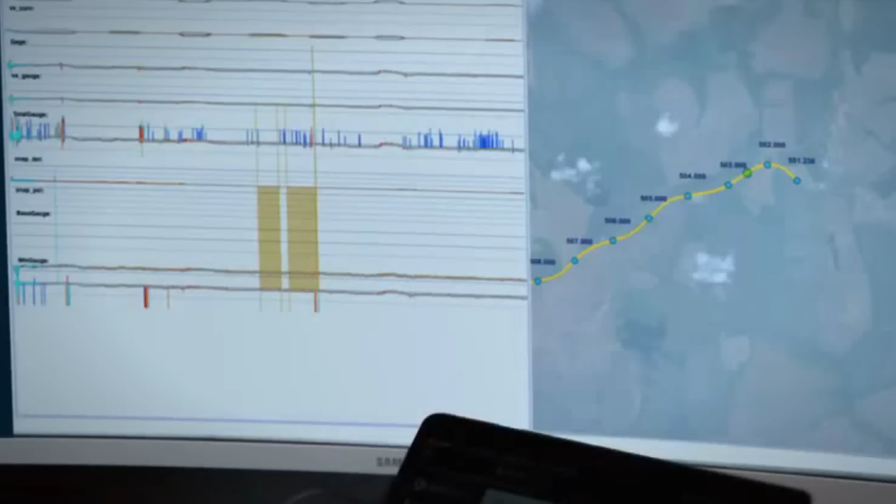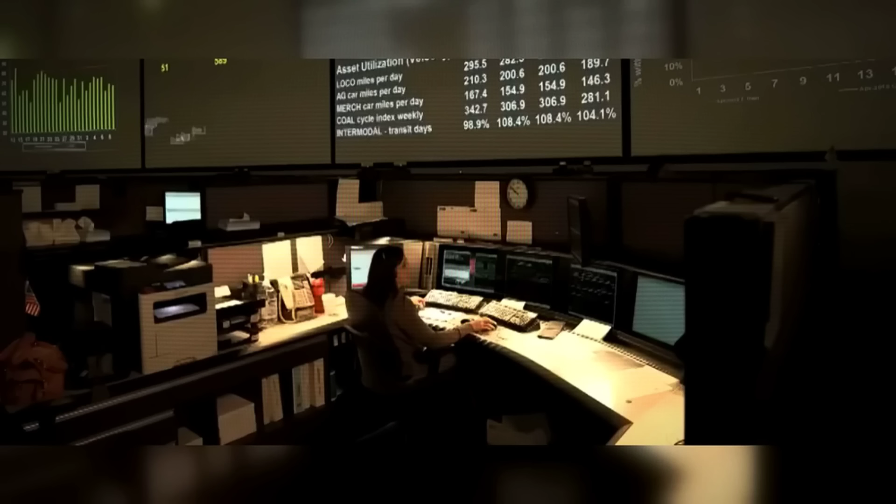All of these inputs compile into centralized bridge management databases. Here, engineers cross-reference actual axle weights, locomotive designs, recorded speeds, and maintenance schedules to ensure the operational limits are never exceeded under applicable railway requirements. Maintaining a consistent speed across a span keeps the entire system functioning safely inside this carefully calculated envelope.

When a freight manifest rolls across a century-old river crossing at 60 miles per hour, the lack of braking is not an act of blind faith. It is the final visible link in a highly regulated chain of institutional oversight. The safety work has already been completed long before the train arrives. The driver is simply executing a pre-solved equation. The train maintaining its pace across the bridge represents absolute compliance with a calculated engineering state.

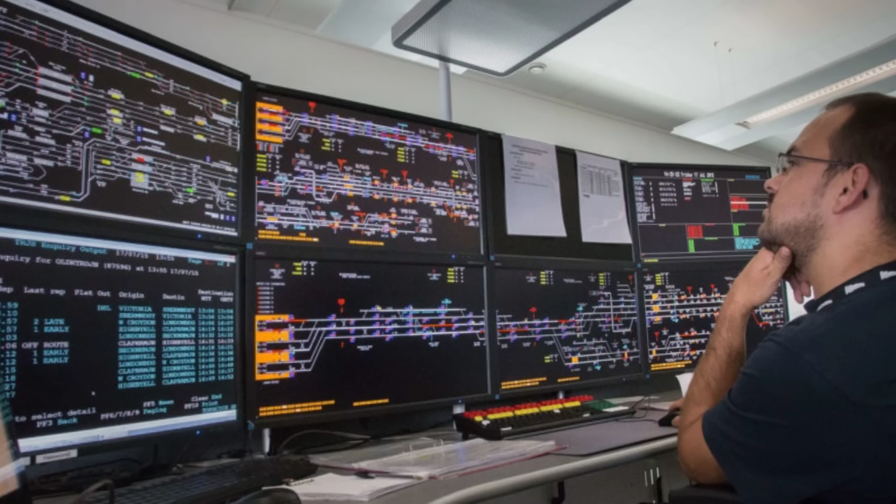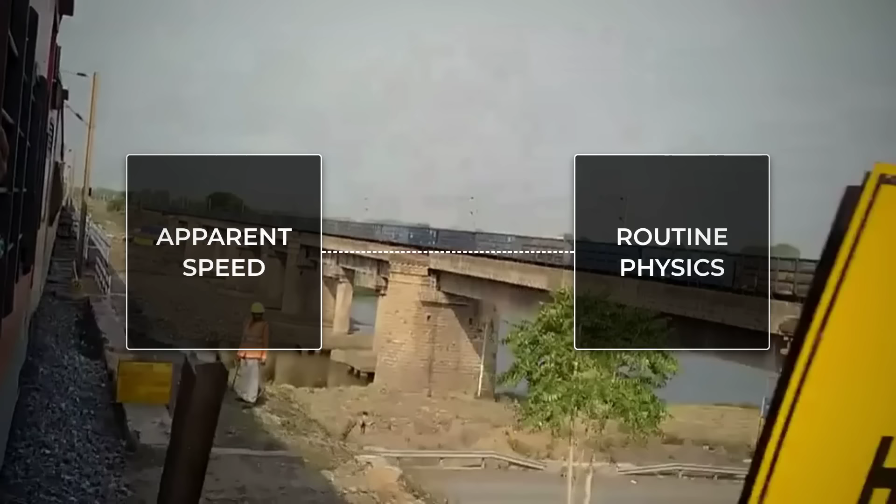The idea that trains never slow down on these structures is a useful provocation, not a literal, universal law. Speed is not inherently safe on its own. Rather, a steady transit remains entirely conditional, dependent on the constant assessment of axle loads, train configurations, and the real-time physical condition of the steel and concrete. When these elements align, the entire system operates exactly as planned, turning what looks like unnecessary speed into routine physics. Safety does not require constant braking.

The question was never, why don't trains slow down? It's why we assume safety looks like caution, when in engineering it usually looks like predictability. Every day, thousands of trains cross aging spans without hesitation, relying not on human intuition, but on unyielding mathematics. As our global infrastructure faces unprecedented demands, this reliance on operational consistency only grows. The train isn't fighting the bridge, it's completing an equation.

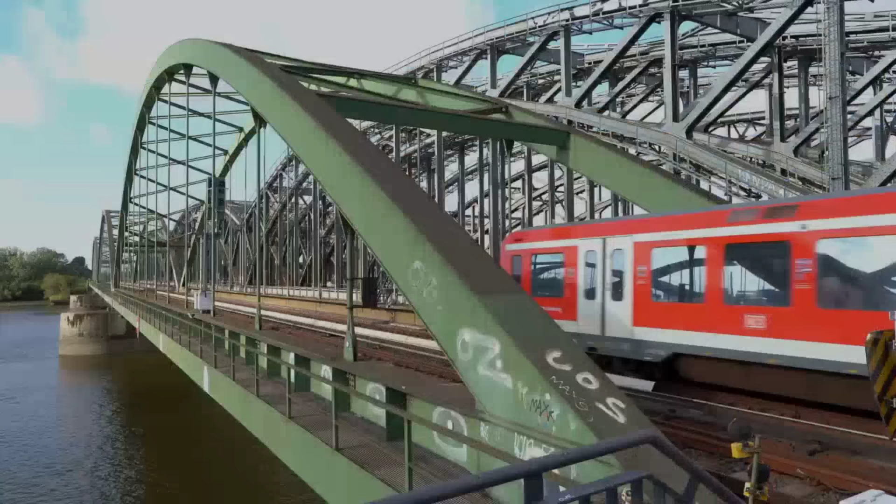Ultimately, the question was never why trains don't slow down. It's why we assume safety looks like caution, when in engineering it usually looks like predictability.